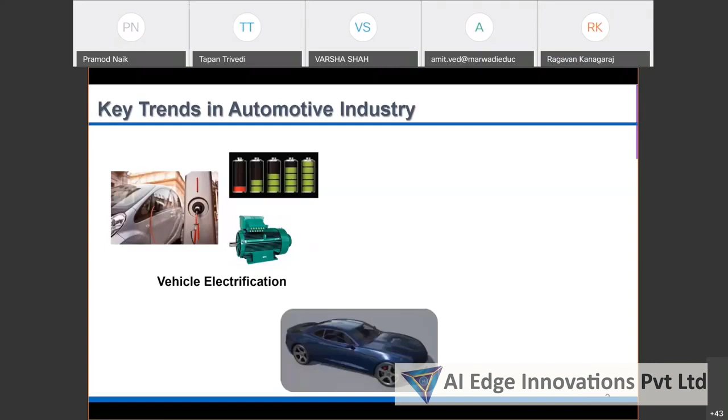Followed by that, we also have a technology whenever we talk about Tesla electric vehicles, we talk about autonomous systems also available in it. So how exactly you would be able to develop that is also what I'll cover as we go further. So a combination of vehicle electrification, autonomous driving, and how exactly model-based design or V-curves are generally followed in industry is what I'll be covering in another 23 to 25 minutes.

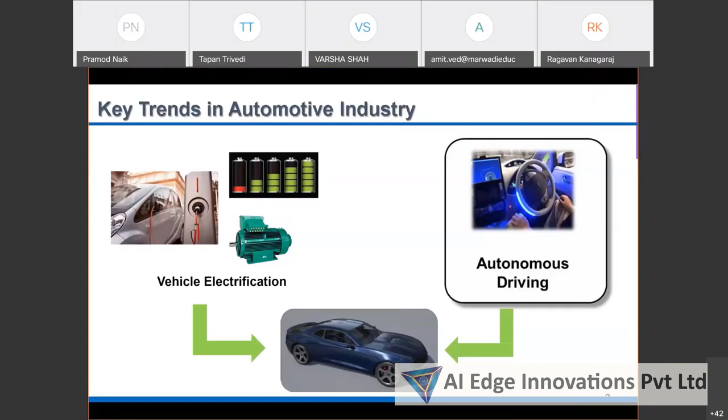And then we would also have a last video on the electric vehicle which we generally have developed. Whenever you talk about what is called vehicles these days, you can see there is an environment, or there is a vehicle control unit, and then there is vehicle dynamics to be controlled, and then there is an environment. But at the same time, there is an AI perception which has been added to any of these systems which we generally see in the market currently.

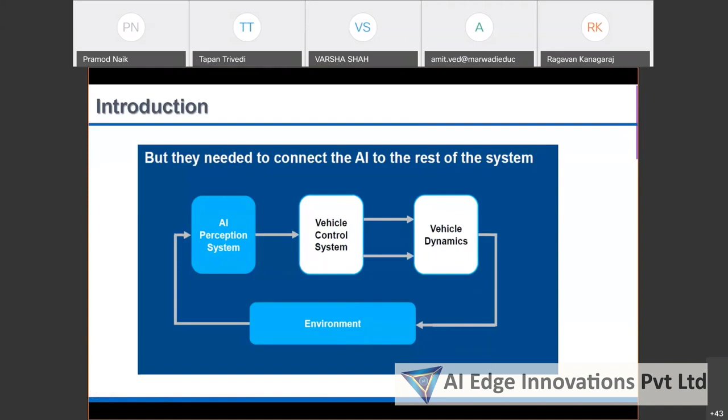Whenever you talk about any traditional workflow, it might be any vehicle for that matter, or it might be in terms of IC engines, or electric vehicle. We'll take one such kind of vehicle, and how exactly the traditional workflow is followed in industry is what we'll be covering. Then we'll be switching across different software which are generally used, like CarMaker or Simulink or MATLAB, and we'll also check how exactly the simulation results would be developed.

Initially whenever you start up with a project, there would be a set of engineers who are your system engineers, there would be the product manager, there would be the sales engineer, who actually start up with a workflow. This is called the V-curve, which has been generally used in the automotive sector. And they approach the customers, or they might be developing their own product.

So initially they arrive at what is called the system requirements. Once they arrive at the system requirement, they arrive at the system level specifications, like what would be the vehicle body, what kind of motors, like sir was pointing out, BLDC motors or different kinds of hub motors, or what kind of motors they have in, so that they will be arriving at.

And then what is a motor controller which you're going to use, and the different power converters you have, and as madam was pointing out about different kinds of batteries, and what is the drive cycle they're going to follow. So this is where we have the system level specification.

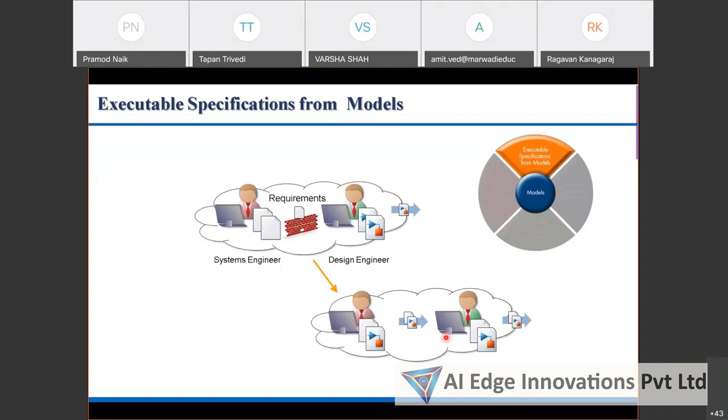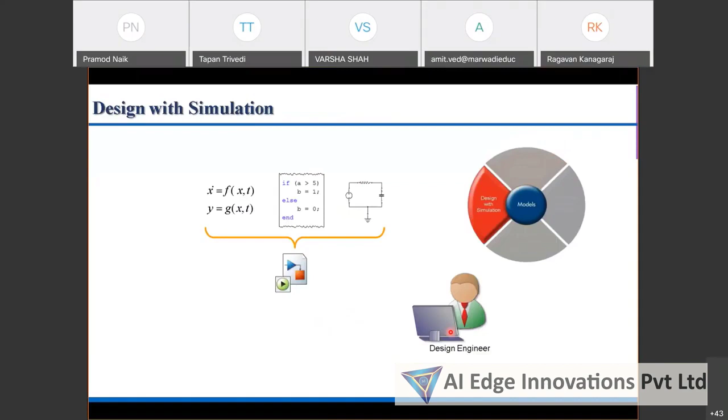Once this is done, they go further in terms of developing the model. So you'd be having a set of equations which you model, and then the design engineer would do a mathematical modeling of a motor or a battery, and based on the specifications or voltage ratings, he would be building that corresponding battery in terms of a simulation environment.

And then followed by that, you'd be having a set of engineers who would be developing these control units, and he has to have this ECU which has to communicate between the battery, between the motors, and then control them. So there'll be different kinds of controllers which you'll be using.

So a connectivity between a system engineer who collects the specifications, design engineer who develops what is called the entire algorithm or the model for you, and then followed by that, you would have a software engineer who would have these control algorithms deployed on an ECU, which plays as a controller area networking kind of architecture or CAN architecture.

Depending upon what kind of models you are deploying it on the ECU, you would be able to come up with these kind of electric vehicles. Now, what happens during this flow is that you would be having requirements, you'd be having a model. You would be having the code generated, which will be running on the ECU.

Once you have followed this particular flow, the traceability, if there is any bug in the model, or any issues, you would be able to trace back and check the simulation results of that corresponding model. To take it further, this is what we were trying to discuss in terms of executable specification, design, implementation, and continuous test and verification.

So how exactly would you be able to develop this? Let's take the first scenario: vehicle electrification. As madam was pointing out, there are different batteries, and how exactly you would have the BMS architecture, develop that battery model, and also look into the consideration of the safety process. To develop this, let me go back into this model here.

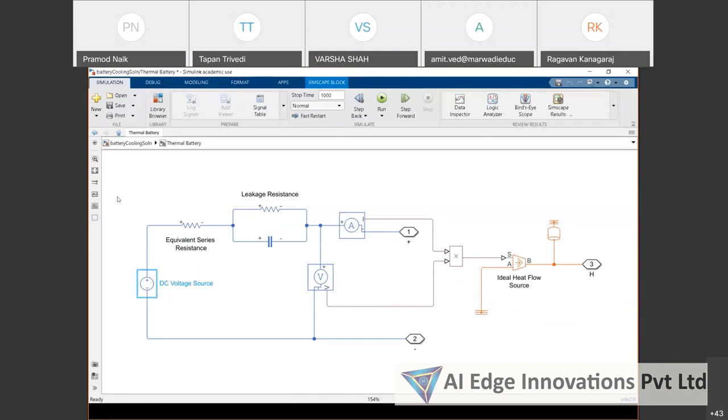What you're trying to do is that if the temperature of the battery increases to a certain limit, you have to automatically turn on the cooling fan, which is connected to that particular battery. To do that, you have a controller, connected to this cooling system, which monitors these particular parameters.

The reference temperature which I've given here is somewhere around 30 degrees centigrade, and I have made it a closed loop system. So if there is any error, it has to identify that, and then control that corresponding battery if there is an increase in load, or any other parameter.

At the same time, I also have a temperature sensor measuring the temperature in real time based on the load which has been applied, for which I have used a variable load resistor, and I'll take it further in developing a complete end-to-end electric model as we go further, where we would have a vehicle body.

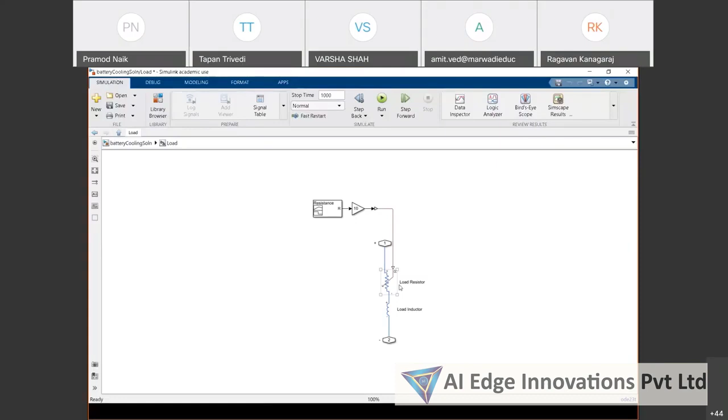We'll take the specification of a car, enter those values there. We would also have a motor connected to it. We'll have different kinds of power converters, and then we would also have batteries and drive cycle connected to it. So this is one of the models where we are talking about having a cooling system.

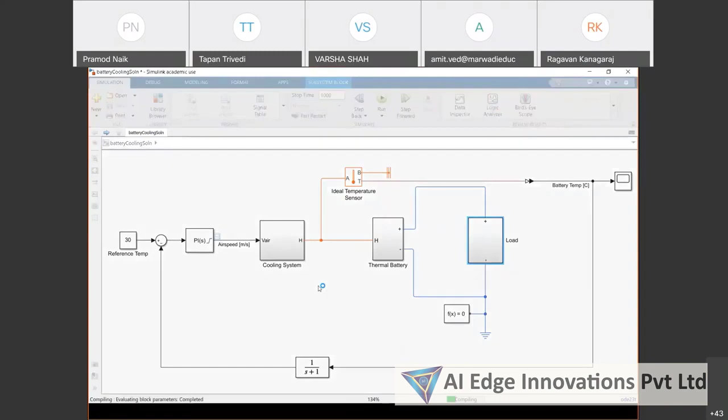Based on the temperature of the battery, it has to perform the simulation. The stop time I've set is somewhere around 1000, and I have used Simscape and Simulink libraries to simulate this environment. Hence I would be able to see that the battery temperature, which was somewhere around 300 centigrade, starts degrading as we turn on the PID controller.

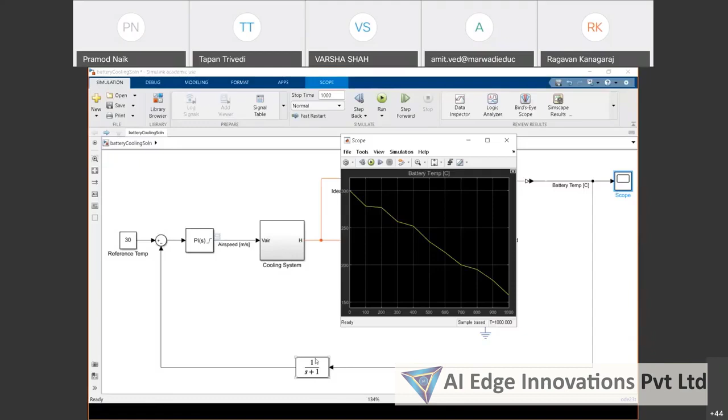So this is how you can use a battery cooling system to reduce the temperature of the battery, hence increase the overall performance, as madam was pointing out in that corresponding area. I'll come back to this as we go further.

You might have seen in newspapers, there was an auto rickshaw which had a battery, and because of overcharging there was a blast in the battery - the vehicle blasted out. So such kind of things has to be monitored by this particular BMS, where you can go ahead with performing some design optimizations in terms of whatever battery management architecture you are trying to develop.

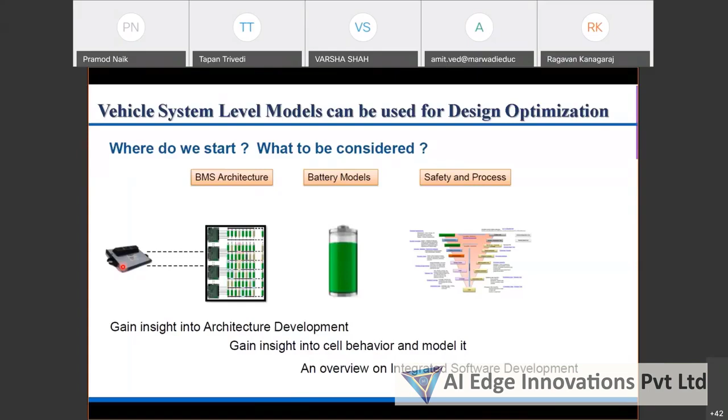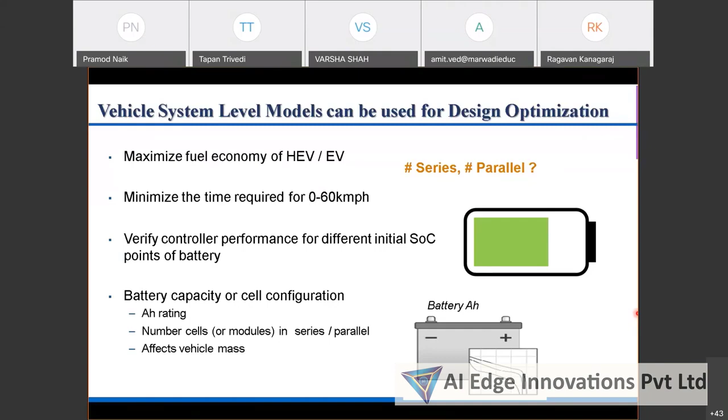So for that, let me just take a specification here. What I'm doing right now is considering an ego vehicle, which is basically a vehicle we generally plan for testing. This is SAE Baja competition data for one vehicle which had a vehicle mass of somewhere around 1500 kg.

So how exactly would you develop this? Generally I go ahead and build this model taking each and every block, but since it's just 30 minutes, let's not do that today. I have already built that model, so let me just take you directly to it. This is how the model would look.

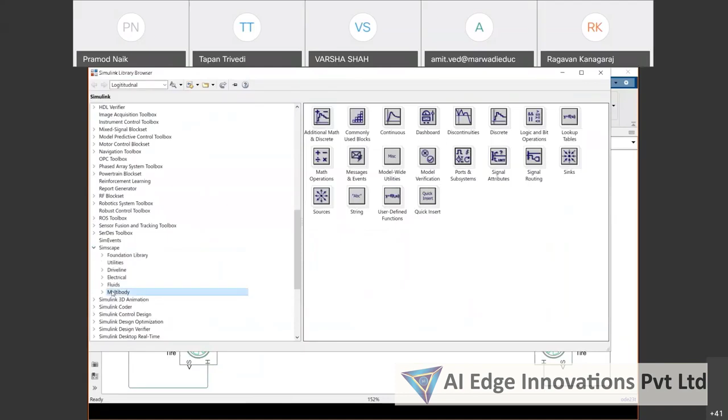I have used the Simscape library. If you go into the library section, you'd be able to see something called Simscape. Under Simscape there are multi-body, foundation, driveline, and electrical. So I've used components from here, and built this corresponding vehicle.

So what does this vehicle indicate? Let me explain it faster. In this vehicle, I've considered a four-wheeler. You can see these are the four wheels, 1, 2, 3, 4, and this is the vehicle body where I'll be entering those specifications.

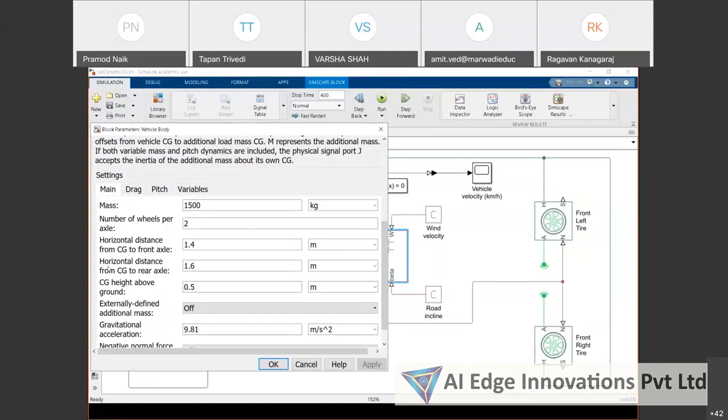Whatever vehicle specifications I had, like the mass of 1500, the axle, the horizontal distance in terms of the CG to the front axle and CG to the rear axle - whatever specifications we had, those we just go ahead and enter in the vehicle body specification in terms of drag, pitch, and variable parameters.

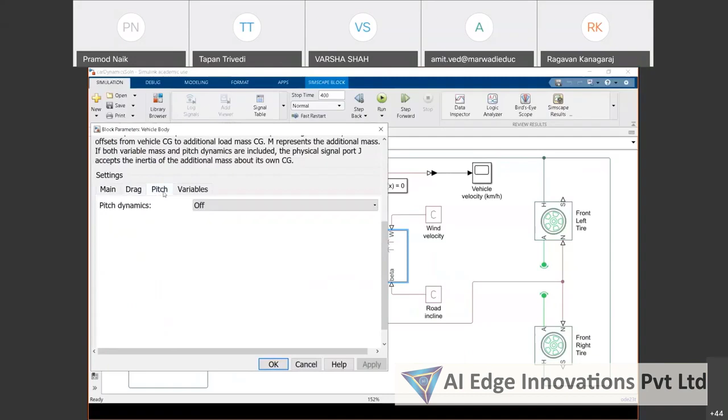To get this block, just search for the name 'vehicle body', and to get the tires you can search for 'magic formula tires'. You'll be able to enter all these specifications. I have not made any changes in the specification of the tires, but obviously in terms of geometry, yes, because that's the geometry given in that diagram. So based on that you set your geometry.

Since this is a Simscape environment, I've connected a solver. We have different kinds of solvers, like fixed step and variable, and under that different kinds of solvers are out there. So I have connected a solver to it, and then this is going to measure at what speed this vehicle is going to travel.

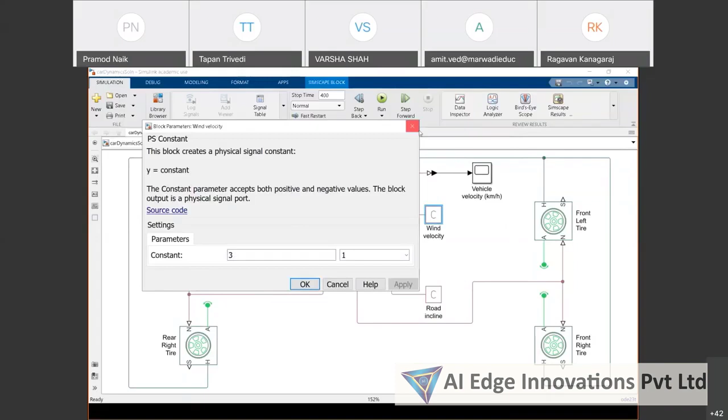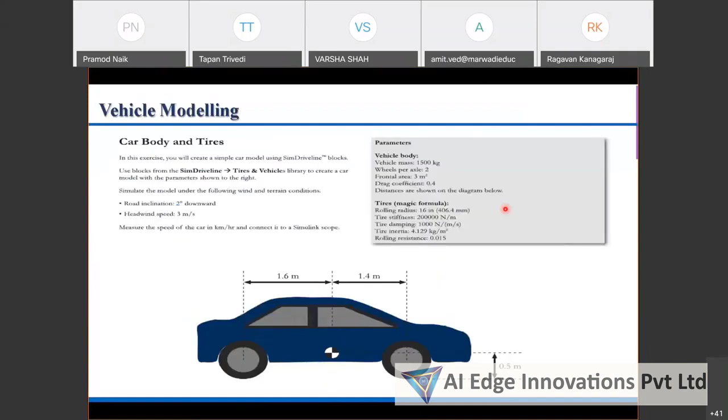I have a wind velocity which was mentioned, which is 3, and a road inclination of -2 - you can see minus pi into 2 divided by 180, that's the specification I have. Now I'm running it for a stop time of somewhere around 400 seconds. So when I go ahead and run this, according to the diagram and specification, what we were trying to achieve is that when I run this simulation with this corresponding environment, it has to run at a speed of somewhere around 60 km per hour.

As madam was pointing out, we have a battery which has yet to be connected to it, but this is the specification.

Okay, based on those specifications, I'm just checking whether the vehicle speed is running at somewhere around 60 to 65 kilometers per hour. So I have already run that simulation. Let me just go back to the simulation and check whether it's giving me that.

Just go ahead and double click. You can just see that it is almost running at the same speed of 62 kilometers per hour. So such kind of models you would be able to drag and build it. If you go to YouTube and type my name, I have created a video where I drag each and every component and make the connections, and what is meant by V, what is meant by H.

All those parameters are out there. Now if you ask what is this, if you want to know more about it, just go ahead and click on it. It will give you the entire documentation of the vehicle, and it would also tell you what is FZ, what is VX, what is FX, what are the values which I have entered, and the variable specifications of those tires.

So you'll get the entire details of each and every block which I have done, and I have also put it in YouTube. You can go ahead and check out this entire model which is out there. You can search it with my name, and you'll be able to find that corresponding vehicle there - I mean building this particular vehicle dynamic model. So this is a four-wheeler vehicle.

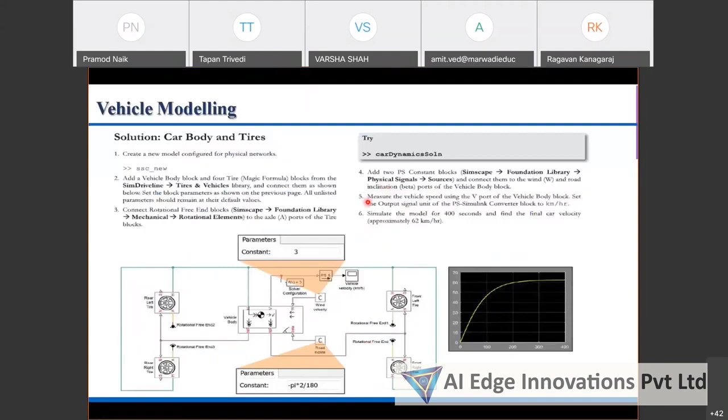Now this is not an electric vehicle, so let's go ahead and build an electric vehicle also. How exactly that would look, we'll also come back to that. Now once this is done, we would focus towards - I have already built the body, that is, I have a vehicle body specification. Now I have to come up with a controller, and then there are different real-time data which you can feed in.

So say for example, how exactly the motor, how exactly the controller, or how exactly the environment simulations are being done in terms of a vehicle is that they don't directly go ahead and purchase the different vehicle body parts and then assemble it. They actually check the simulation on a simulation environment, and based on that check whether it meets their requirement or not, and then arrive at the final vehicle spec.

So this is where I have an FTP75 drive cycle data. I'll show you this model also. So where we have a driver - whenever he presses or accelerates, the vehicle has to accelerate, and when he decelerates, the vehicle has to decelerate. And this is the vehicle data.

So based on the vehicle - that means he is looking at the road, and then based on the road humps or based on the traffic, these are the ups and downs. So based on that, the vehicle has to drive, and the controller has to respond based on the vehicle data, whatever four-wheeler vehicle you have, and to that you would be connecting the battery model.

Okay, so once you have the battery model, you would be able to trace the velocity, motor speed, motor torque, what is the battery SOC - as madam was pointing out in terms of battery current - what is the fuel economy, that is MPG in terms of miles per gallon. So how exactly you would be able to model all this in a simulation environment is what we have for you in the next model here.

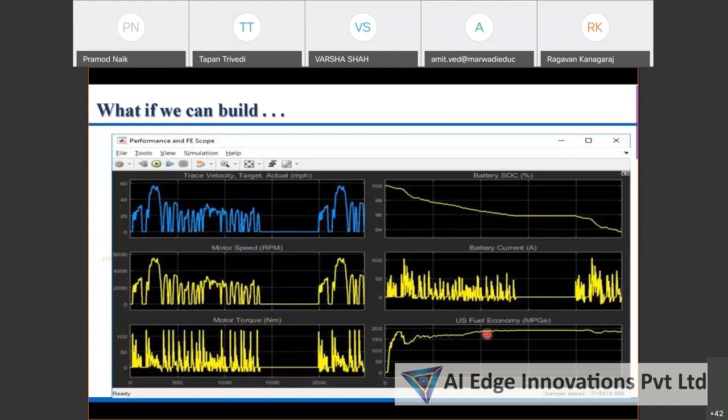So to do that, this was for one of the projects which we built for VIT. You can just see we have the same - I've put an image of an Electric S-Class. So you have this battery managed. This is the drive cycle which I was talking about. These are direct blocks which you generally get in.

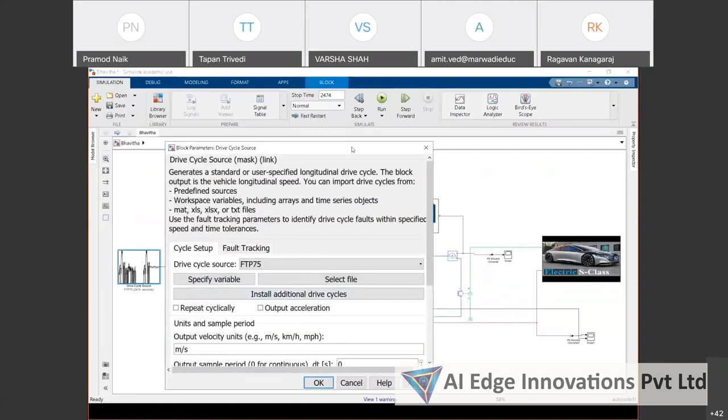So if you have your own drive data, you can just feed it here. You can see that if I click on this dropdown, you can feed an Excel, MAT, text, or different files, or you can enter different data in terms of acceleration or deceleration, or select a specific file of your choice.

Now when you run the simulation, you can see this is the data which you're feeding in - this is the time and this is the velocity. That data you're feeding into the vehicle. This is called the drive cycle source block. And then you have a longitudinal driver - what this longitudinal driver does is act as a controller, but you can see that here there is a vehicle where you have two options.

One is to accelerate and the other is to decelerate. So one is for acceleration, another is for deceleration.

So as sir was pointing out about different converters, you can see this is where the control mechanism happens. I have used a controlled PWM, so you can use different kinds of controllers, and then you have an H bridge, and then you have what is called the controlled voltage source, which is controlling this particular part.

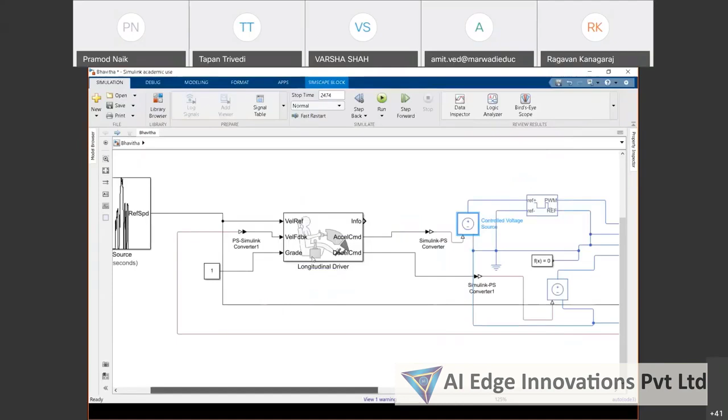So one is going to this control source, that is when he presses the acceleration. There is one signal going here and one signal going here. Based on that, the controlled voltage input is given to the controller, which is actually controlling this corresponding motor.

So I've just connected a DC motor. You can go ahead and connect any model of your choice, or any motor of your choice. Now followed by that, this is where I'm representing a battery.

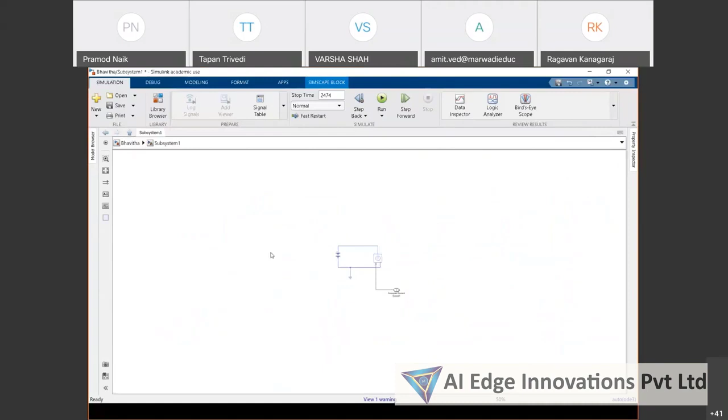You can see that the battery voltage for this model, I've given it as somewhere around 300 volts. You can go ahead and make the changes. So this battery input is now given to this particular motor, and this motor is connected to the four-wheeler vehicle which we have.

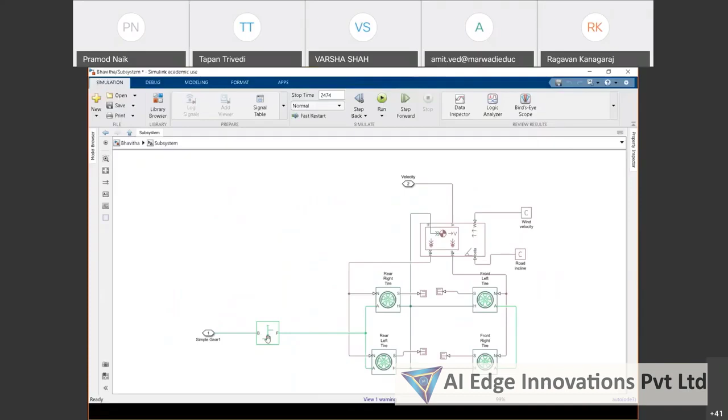So this was the four-wheeler which we developed, and this is the simple gear mechanism which I have put here, which is sending the signal to your vehicle. Based on that, how exactly the vehicle would behave, or at what speed the vehicle is moving, is what you're checking here in the scope.

And this is the converter where you are taking a vehicle feedback and checking the simulation of it. I've set the stop time at somewhere around 2474, and based on that you would be able to build an entire simulation environment, and then check the simulation results in the model here.

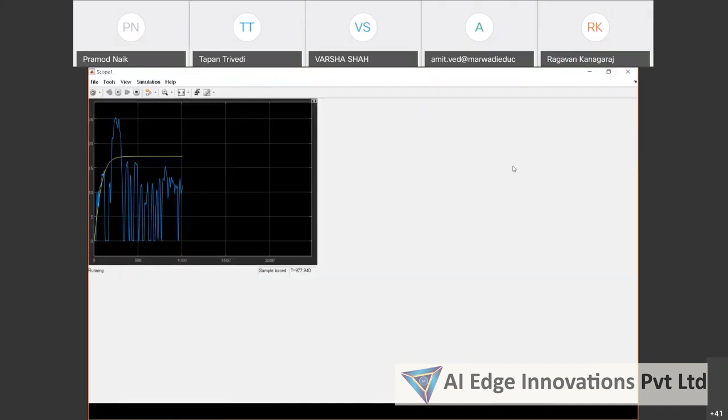So you can see that on real time you are feeding that data, but you can see that the vehicle, even though there is this data, in this terrain it would drive at somewhere around 18 to 20. In that range, you can see that the vehicle would be maintaining a constant speed, irrespective of the drive data which it has.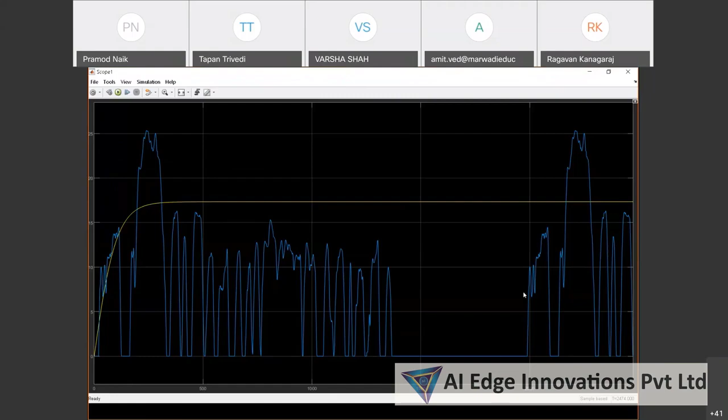So this is for this voltage rating. I have also added, because these are having Simulink electrical components also, a Power GUI block also to run the simulation.

So this is how I would be able to build an entire end-to-end electric vehicle simulation model, which has a motor, a battery, and also a chassis of the entire vehicle body in terms of developing what is called an electric vehicle model.

So this requires a lot of explanation, but because of the time I would not be able to explain much. But obviously at the end of the session I would be giving you detailed data where you can reach out to me.

So just remember, this is the vehicle body, and then you have the motor, and this is the motor controller unit you have, and then you also have the power converters here, and then you have the battery, and this is where the drive cycle is fed into the vehicle. So this is the entire end-to-end simulation which you generally see in terms of developing any vehicle.

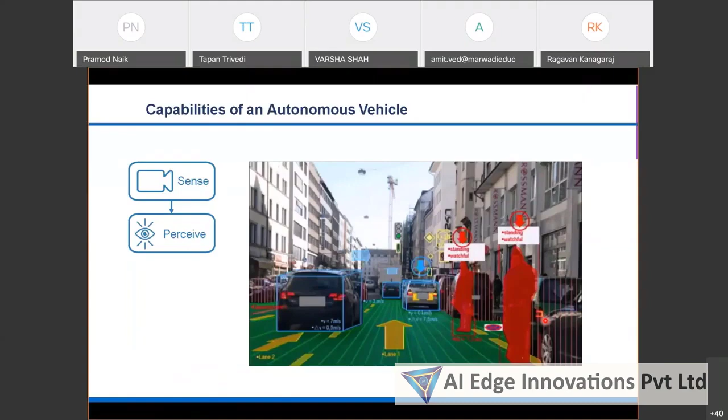Whenever an AI agent is working, there are different kinds of AI agents out there. It has to perceive that, and based on that, it has to decide, plan, and then act. So how exactly can these corresponding simulation environments be developed? That's where we test it in terms of ADAS AD testing virtual 3D scenarios.

Let me just come back one minute here. Left, sir. How much time do we have? 1 to 2 minutes, sir. Okay, okay.

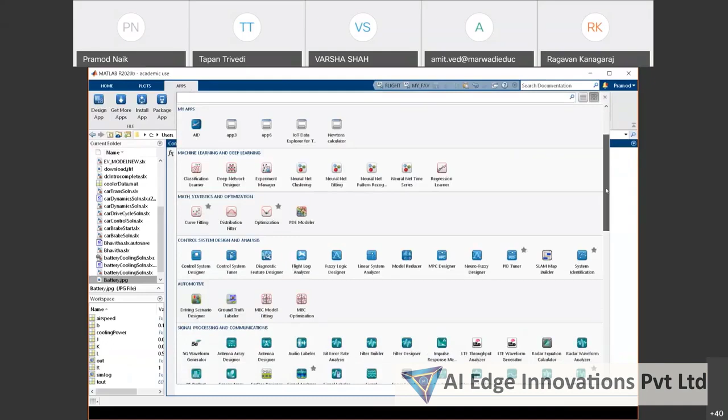You can just come down to the app section here, and say drive scenario. It's taking some time. I wanted to show you the system identification also, but I'm skipping that demo, I'll cover it later.

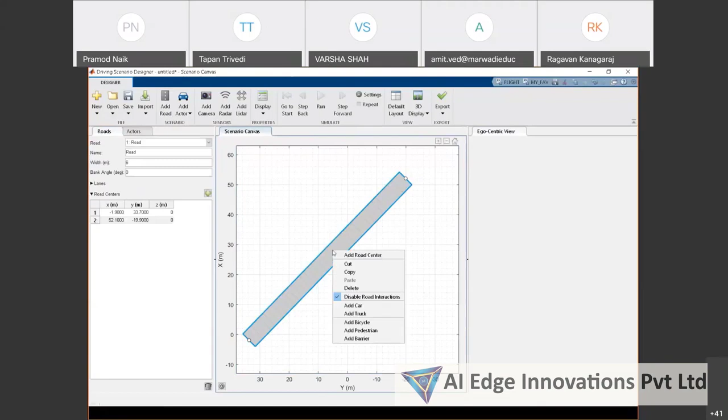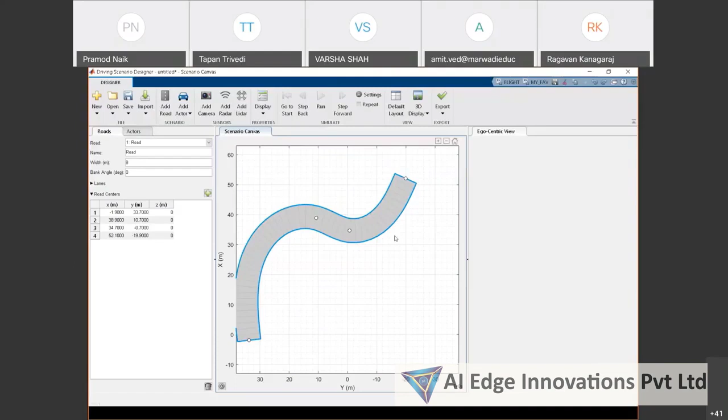Now I'm clicking on add, just drag and create a road environment like this. So you've dragged a road, and then you can add a road center point, double click on the road, and here you can change it, let me make a tilt here, or I think this would be too difficult. Let me make it circular instead.

Once this is done, I can click on add, and place a car here. It's not taking my data. Let me make it like this. Add waypoint, let me just say.

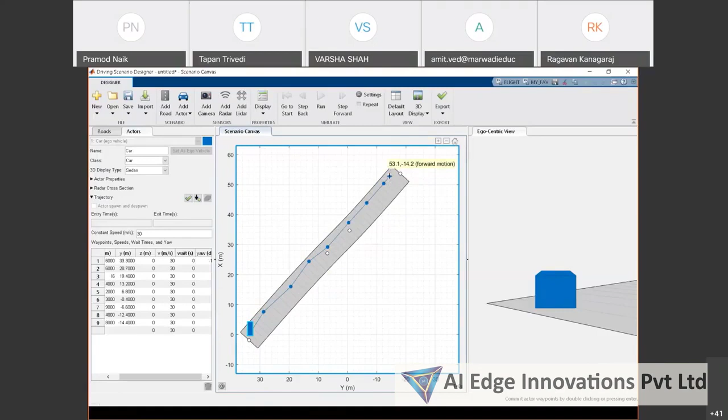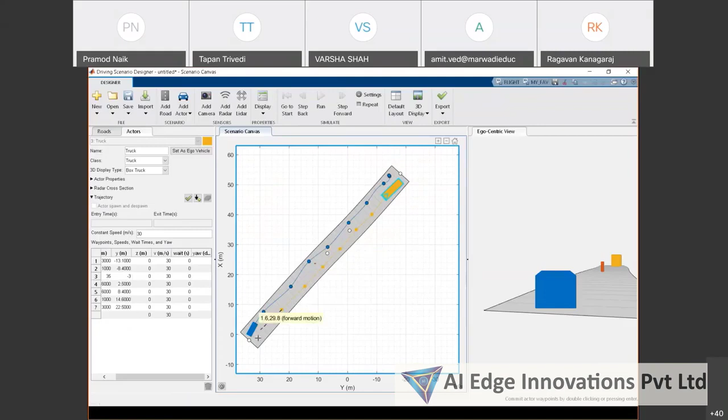I'm adding waypoints now to my vehicle, which is traveling on this road. We can set different vehicles here. Let me double click here. I can add actors, like a pedestrian somewhere here, and also add a truck coming from the opposite direction. I'll add waypoints to it as well. So that's the waypoints which I have.

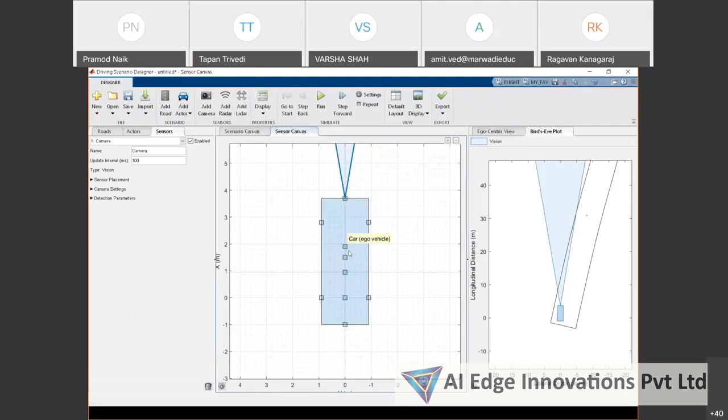Now what I can do is add radars or lidars, whatever you want. I can click on this and add a camera here, and then add sensors like radars which are required. I've added a radar, I've added a lidar also. You can place them at different locations - I've placed it in one direction only, but you can have a radar here too, and change the angle. It depends on what kind of environment you're looking for.

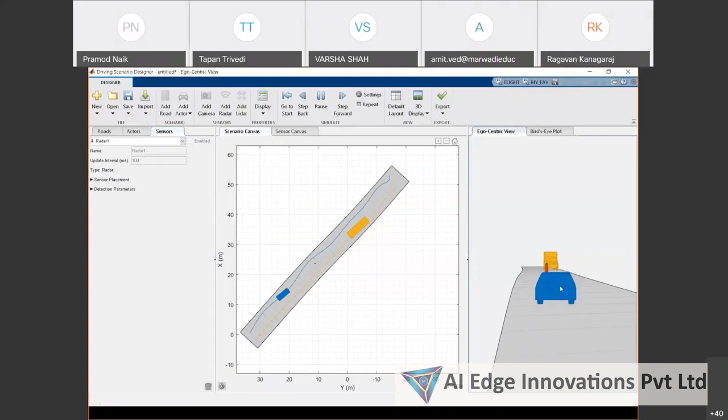Then you can go ahead and run the simulation here. You can see the vehicle is moving across, and at the same time there is a pedestrian. This is the simulation environment you're having. You have a tilt here - when the vehicle is traveling at 30 kilometers, you're trying to identify whether the vehicle dynamics hold good so that it doesn't hit the pedestrian standing on that road. You can see it has taken a tilt, and both vehicles are not hitting the pedestrian standing there.

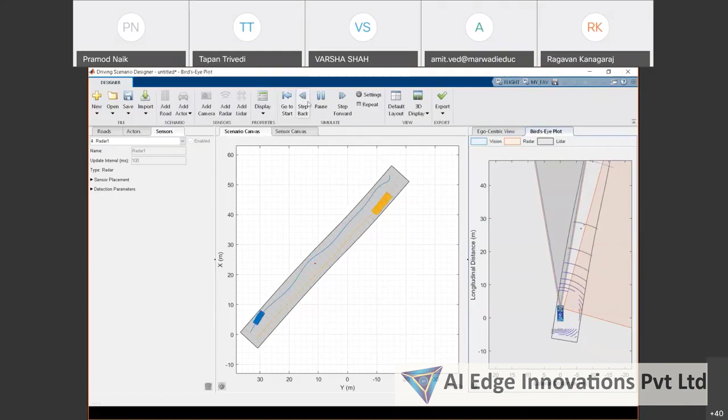At the same time, you can also view that in the bird's eye plot in terms of a 3D simulation environment. This is in terms of the vehicle. And then if you go ahead and click on view this in terms of... okay, you can just say step forward.

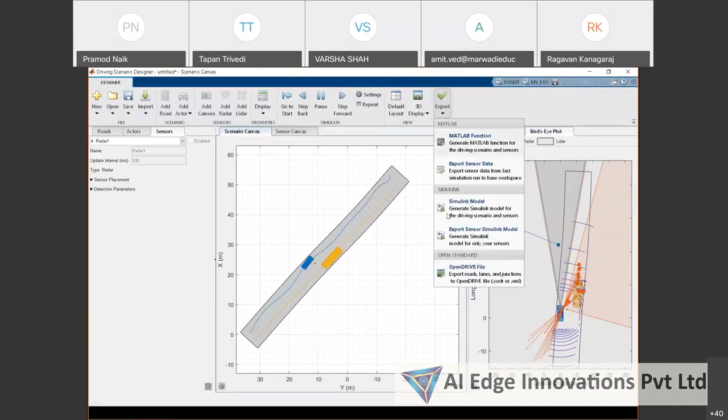You can export this into a 3D simulation. At the same time, you can also generate code. Whatever we just generated can be exported as a Simulink model, or it might be in terms of sensor fusion data, or a MATLAB function also, which you can export and then develop those corresponding models in terms of any algorithm you're trying to develop.

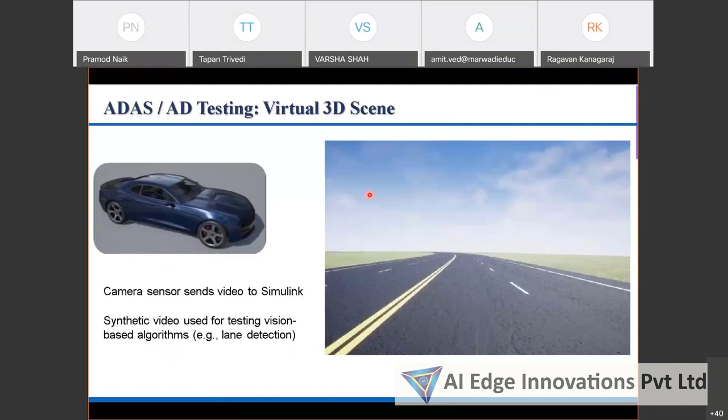Like this, I'll show you the 3D environment also. Give me 1 minute, let the simulation complete. You can handle different kinds of simulation environments in terms of virtual environment where you would be able to handle ride handling, chassis control, or identify vehicles moving in front of the vehicle and test them in a virtual environment. This is what was the video. I think after the end of the session, I'll point out more.

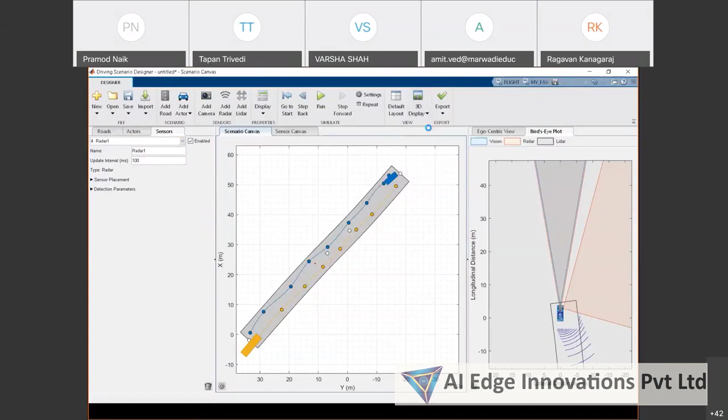I wanted to show you the ego vehicle also, but given the time duration I won't be able to do that. At least with the 3D simulation environment, let me take some time to view it. If there are any questions, put them across, and I'll take those up while the 3D simulation environment loads. It will take a couple of minutes.

You can see it's loading the virtual environment now. In this virtual environment, you would be able to simulate the entire vehicle which we just developed. You can see that we are using this vehicle now.

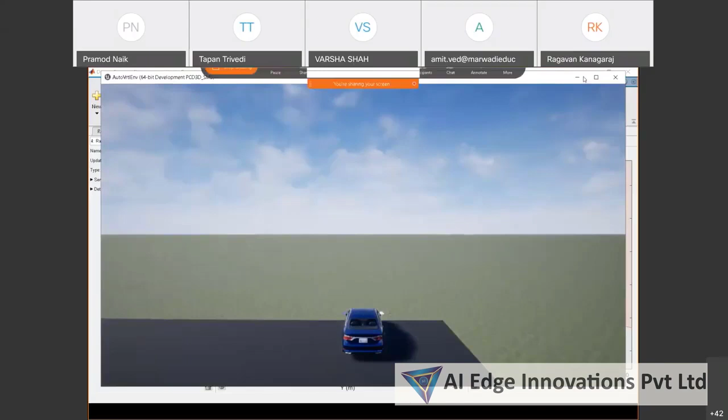Let me minimize and run this particular simulation once again. So, yeah, you can see now we are running it in the 3D virtual environment. That's the same car.

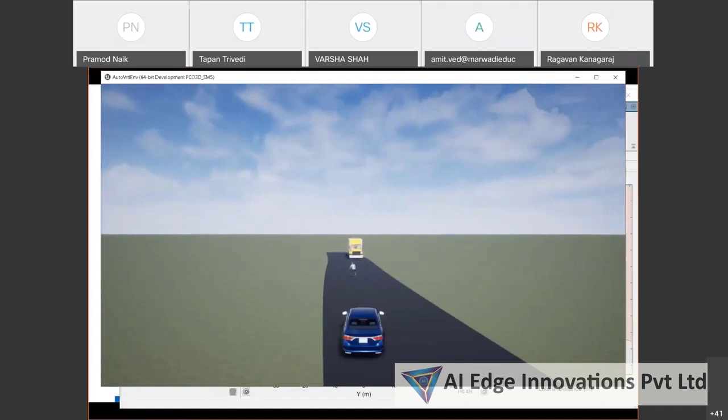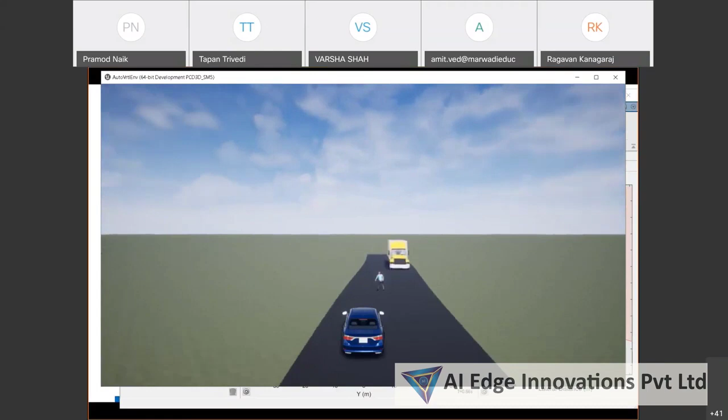We have a lot of options here. Even though I had given those waypoints, now we are trying to identify in the first simulation environment, this virtual environment where you can see it tracing the path. There might be a small lag because I'm feeding an HD video here, but on my system it will run fast. You may see a small lag, but you can increase the speed, because I've just given it 30 km/h.

You can increase the speed of the vehicle, and later in simulations we would make a pedestrian cross the road and check whether the controller has the ability to control and check the specs. Such algorithms we develop, and at the same time these are the data we generally consider in developing ADAS vehicles.

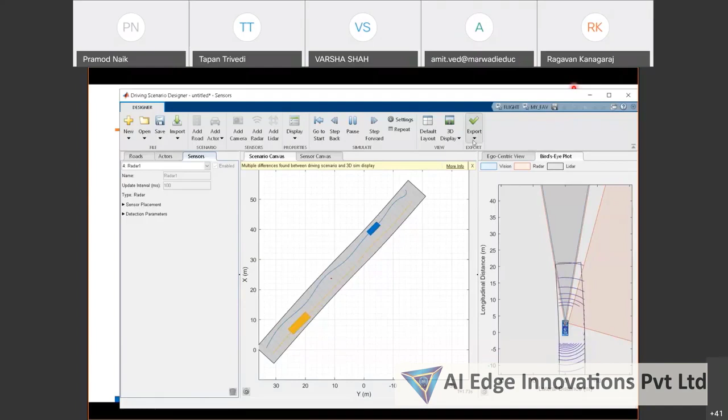Once this is done, you can go here and export the lidar data, radar data, whatever data you want, and you can see it generate that as a function also. If you're working specifically on a specific set of data, you can use the Sensor Fusion Toolbox and develop such algorithms there.

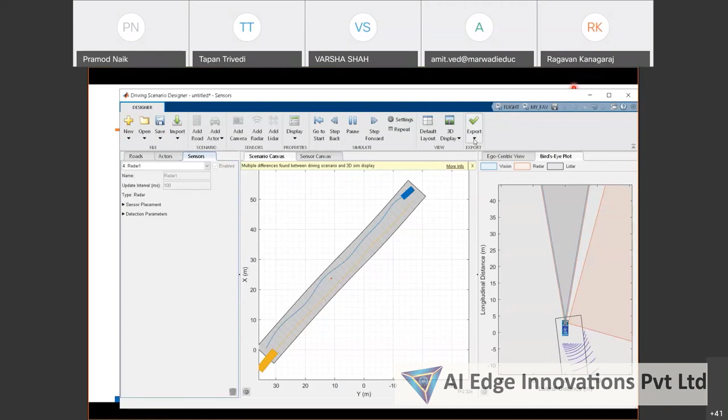And then you can also see it generated the MATLAB function. Similarly, you can see that almost around 200 plus lines of code is generated, and then you can also go ahead and generate the sensor data.

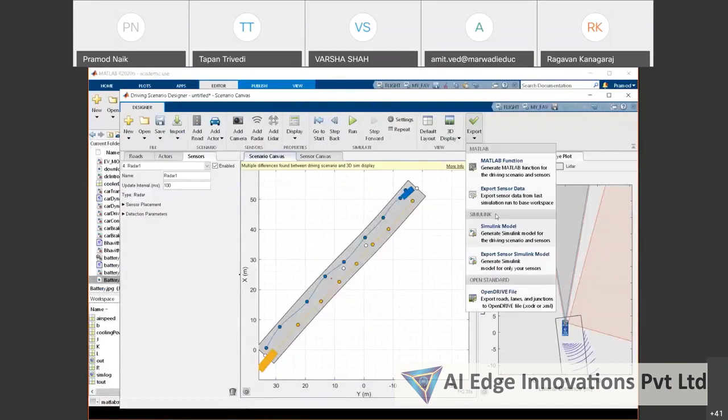This video which was shown, I'll share you this link. It's a video from 2012, almost 8 years back, and we already see vehicles in India being tested. The ego vehicles, or whatever vehicles we have, if you have the latest version of MATLAB installed, you can see the MATLAB team has a lot of examples where live vehicle data is being tested, where lidar has been placed on the vehicles.

These are capturing live data. Generally, when you look into any vehicle, they would be capturing three-dimensional point cloud data, but the lidar is basically capturing local data, and in terms of radar there are four radars at different locations capturing data, and then you would be able to check the simulation results of it.

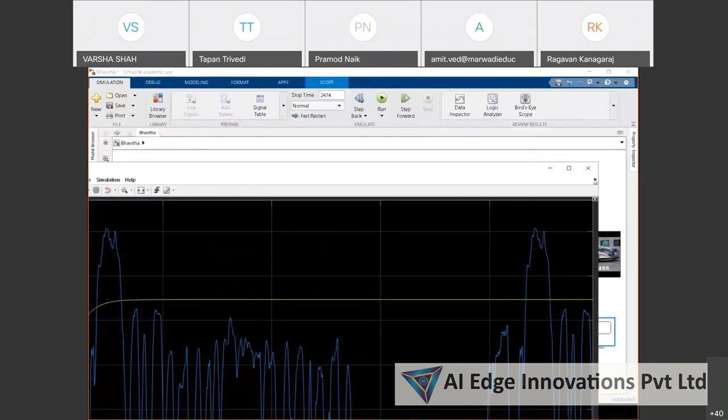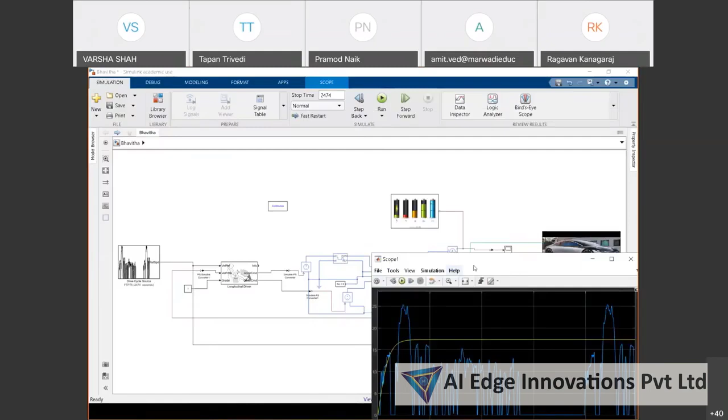Depending on the area for which you would like to design this, with the help of the simulation model you can calculate the power requirement, and based on that you can size the battery and all other components.

There's a second question, ma'am: once the life of the battery is over, what can we do with it? Is it possible to recycle?

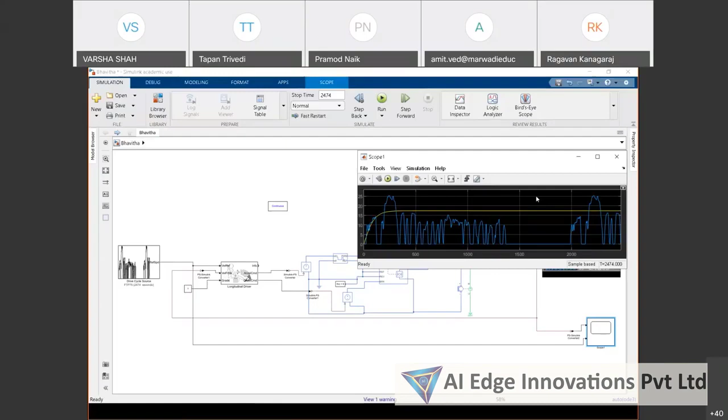We may go for recycling, but normally this used battery, which cannot be further used for EV application, is usually used for grid application, home application, and other applications where the power requirement is not continuous. There you can use this battery.

What I have heard from Tesla is that they are using that battery - a second use of the battery - for grid application.

Thank you, ma'am. Which one is better, battery or ultracapacitor? Or if we combine them, what will be the configuration? Actually I have combined two questions here - which one is better, the battery, I will answer.

As far as the application of a vehicle is concerned, depending on how much range you want to cover, the primary source must be battery, isn't it? For example, if I have a four-wheeler for daily use in a city, our maximum coverage is within 40 kilometers, not more than that.

Or even lesser than that - 10, 20 kilometers go and return. In that case, if you're not getting any point where you can stop and charge your vehicle, and we know the battery charging process is time consuming, you need to have the battery.

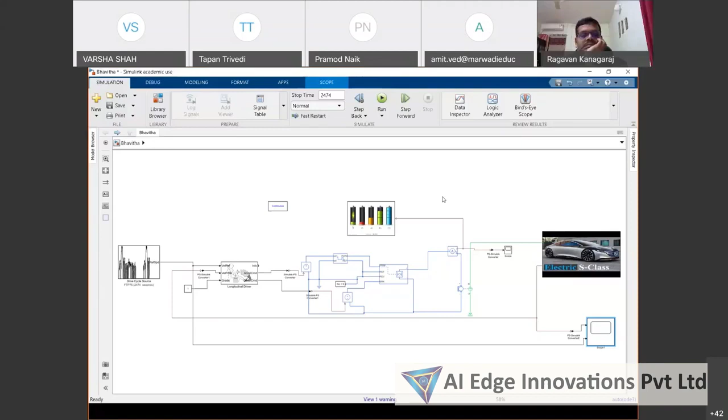Yes, sir. Should we mute, sir? Okay, sir. Yes. Okay, sir. Now, the first question to you, sir.

Which type of electric motor is efficient in the application of electric vehicle? Why? What is the target we have to see? If the target is a space constraint, then we have to go for a permanent magnet motor, because with the permanent magnet, energy density will be better. So in the same volume, you can accommodate a motor of whatever size we want, whatever power level we want.

But if space is not a constraint, like in a train, there is no space constraint actually, so there is no requirement of weight reduction also. Suppose in a two-wheeler, the weight of the motor without permanent magnet is 15 kg; with permanent magnet, at the same power level, the weight goes to 10 kg. So 5 kg comes down, and therefore mileage for every charging will be better.

Whereas in a four-wheeler or train, there is no such constraint, so we can go for induction motor actually. Why induction motor? Induction motor is a very matured technology, and also we don't have powerful magnets, that rare earth magnet, neodymium iron boron, in India. It has to be imported from China. So if in all trains we go for PM motors, then after some time, when there is a requirement of replacement of magnets, and if you are not getting the magnets from other countries, then all the trains will be stuck at stations only, not moving. So it's better to be independent of other countries for such applications.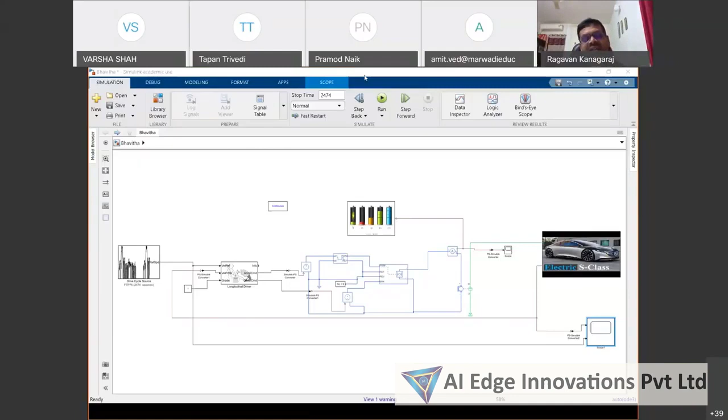But when it is produced in large scale, then the cost will come down. So initially the cost will be high. Whether such an electric vehicle will be popular in the market is a question mark in the beginning. So later, when it is produced in large scale, yes, the cost comes down, then people will be able to afford it.

Let me check if there is a - yes. What is the application of field-oriented control in induction motor?

Field-oriented control is already implemented in all electric trains. Basically, it is a vector control. It is already implemented because we want to have torque per ampere to be maximum.

What is this field-oriented control? Basically, the active current component and reactive current component are actually 90 degrees apart. So now we keep the flux as the reactive component, and whatever current is drawn from the stator supply will be exactly at 90 degrees.

We want to mimic the DC motor performance. In a DC motor, the armature MMF and field MMF are always at right angle to each other. Similarly, we wish to have the flux and the armature current, the MMF produced by the stator supply. In induction motor, we want to mimic exactly DC motor performance, so the angle between these two MMFs is 90 degrees.

So sine of 90 degrees is maximum, so torque per ampere is maximum with vector control. That is already implemented in all trains.